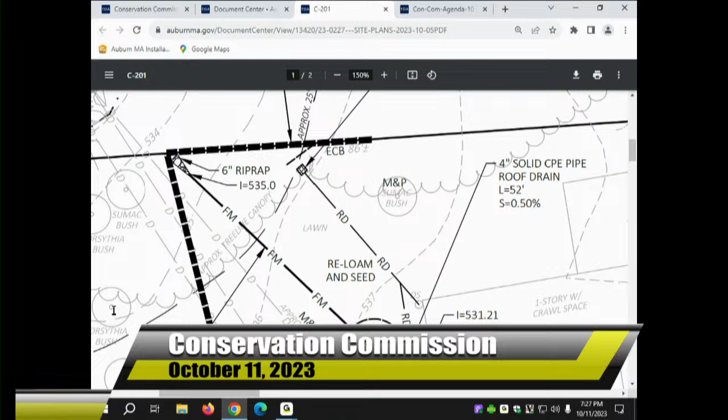So what I proposed in that situation was a slotted drain, or one of the NDS drains that you can get at Home Depot for like $30, with perforations in the bottom of the drain with some stone. That would serve as the overflow, so that when the water comes down through the downspouts and comes out to that area, there's enough gravity or enough grade in that area to cause it to just come out the top and be flush with grade.

The other situation was pretty interesting, a little bit more challenging. As engineers, we like to avoid mechanical systems, and I tried to do that here. However, as part of my limited topographic survey, I had gone out to the lot, shot the elevation of the top of the foundation, grades around the house, the elevations of the existing.

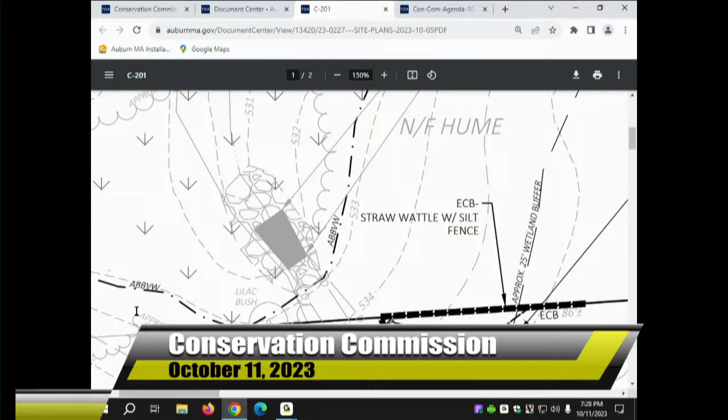If you could, Jesse, pan to the left over to the rear left part of her property. There you go, north. So there we have a flared end. It's a 36-inch HDPE high-density polyethylene corrugated pipe, along with a 2-inch water pipe.

It's a polyethylene pipe. That was installed years ago by the Auburn Highway Department, now the DPW. As part of the installation of that, Bill had installed the force main for the sump pump in the basement. Historically, like all the houses in that area, the hydrologic soil group in this area is hydrologic soil group D, and as you folks know, that's a horribly draining soil.

It used to be an old farm. They rerouted a stream eons ago in that area. So what they had done is, in some parts of the site, they left the soil. Other areas, they put in some of the Hinckley soils off the hill to the west, which are well-draining soils. They brought it, pushed it down below. So if you dig a foot down or so, the soils are great. However, when you get deeper into the ground, you can find those Woodbridge soils.

So with that, I looked at it and I said, okay, the infiltration, that's part of the problem why we're getting what we're getting in the basement. I took some photos, which I included as supplemental information to the Little Diggers filing, along with the plan. As you can see in those photos of the basement, there was standing water in there a week and a half ago. I can pull those up if everyone wants to take a look.

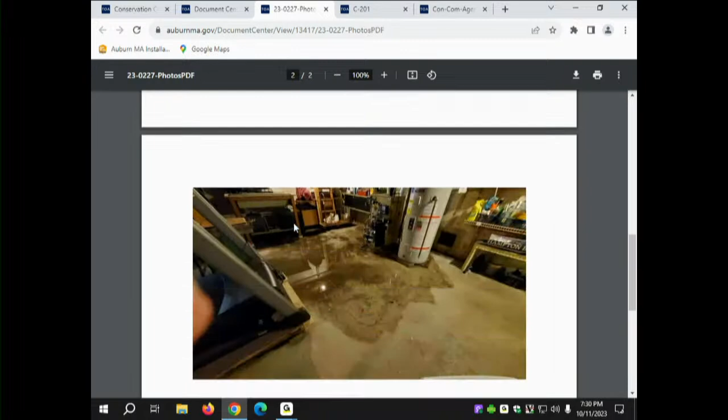Yeah, it was, and this is something that they've lived with for a while. Very frustrating. There's a new oil tank there, which will help to address one of the comments raised by DEP. But there's standing water, it's horrible. The sump pump goes on, I would say, every 10-15 minutes throughout the winter, and in the summer, all summer it's been going. So I think this is a project that needs to get done.

So what they hired Little Diggers to do, if we could go back to the plan, Jesse. Thank you. So right here, this is the existing information in terms of the inverts of the pipes. Knowing the area very well, what I've noticed is that in the less frequent storms, you're 25, you're 50, some people say you're 100. We haven't, as far as I know, in this town of Auburn, we haven't seen one of those yet.

But in looking at these storm events, what I've noticed is the pipe, typically that 36-inch pipe, is designed to flow typically half full. I've seen it flow all of 2/3 full and then some. So with that said, looking at the invert elevation, Jesse, if you could pan up a little bit so I can see the invert elevation callout. So that invert is at about a 530.6 on that flared end section.

The invert elevation on the force main is at a 532.8.

That just so happens to be about the same elevation of the basement floor, based on the top of foundation, measuring down the wall and determining the slab elevation. I said, okay, so we're at 532.8.

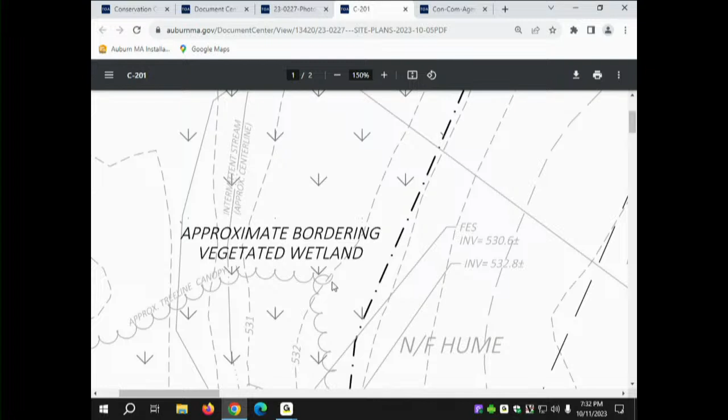I went to the bottom of the footing for the foundation drain. By the time I daylight the foundation drain out to that location, Jesse, if you could go out, it would have come out somewhere, if I recall, like 531 and change, 531.2, 531.4. Coming out at that elevation, it would have been submerged in the tailwater of any storm event.

That would only exponentially exacerbate the situation in the basement. So had we flowed gravity to that location, when that area surcharges, it's going to back water up through the pipe that would have been put in the ground and come up into the basement.

The plan originally submitted by Little Diggers was looking at a gravity system. If you didn't know the history of how that pipe functions, or how hydraulics work when pipes are designed, they're designed to flow half full or two-thirds full. If you didn't know that, you'd probably site it at that location.

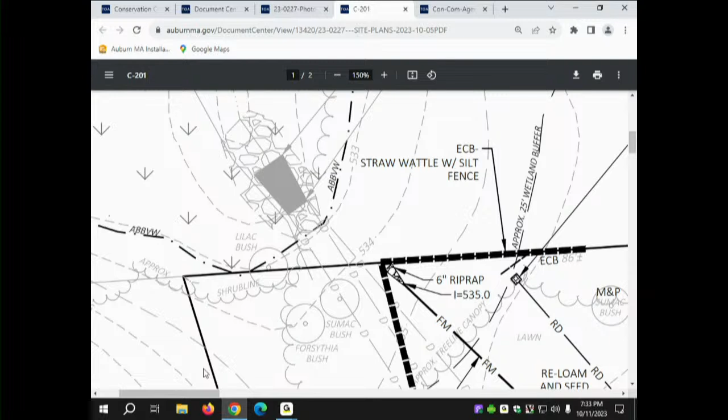Well, having known that, I said it's obviously going to have to be a pump system, something I don't like doing, but in order to rid themselves of the situation, they have to do it. Jesse, if you could go back over to the foundation, please.

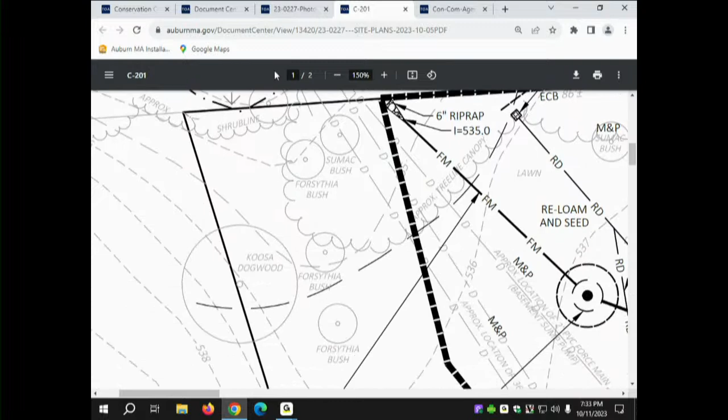So what they are proposing is along the front where you see the FD, the bold line, that's the foundation drain. They're going to excavate the front of the house down to the bottom of footing, put in the foundation drain, wrap it in a filter sock or Mirafi fabric, and then put 3/4 inch to 1.5 inch wash stone with a Mirafi liner up the sidewall to prevent any silt from making it into the stone, and that will serve as their foundation drain.

That'll come up to within about 6 inches of finished grade. That will flow from that elevation at 0.5%. I could have put it in flat, but I wanted to get it the heck out of there, so I ran it at 0.5% from over by the garage at the 533.5 all the way over to that circular structure, which has got a drain manhole.

It's going to be a precast drain manhole, only because of the depth of the structure. And so what it is, it's a pump chamber. They would have a pump chamber, with a pump located at the bottom of that pit.

I have a 3-foot sump in there so that the water will flow through the foundation drain into the pump chamber, drop down into the 3-foot sump, from where, once it fills 3 feet, it's going to get ejected out to the riprap apron out back.

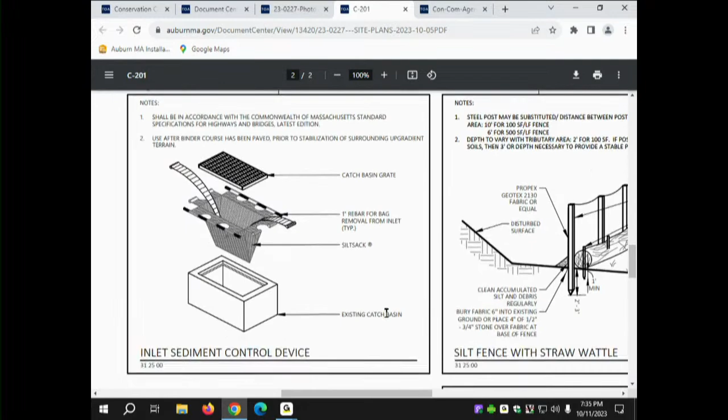Yeah, so actually, if you want to zoom out totally in the detail sheet, I can tell you what we're going to do for erosion and sediment control measures.

So if I could, I failed to get into the total scope of the project. It's a few things: there is a water pipe, she's looking to have the water service to the house replaced, she's looking to have the foundation drain situation addressed, rooftop runoff redirected underground, and she's looking to have her front walk redone and the front steps. So it's a little bit more than a new water service to the house.

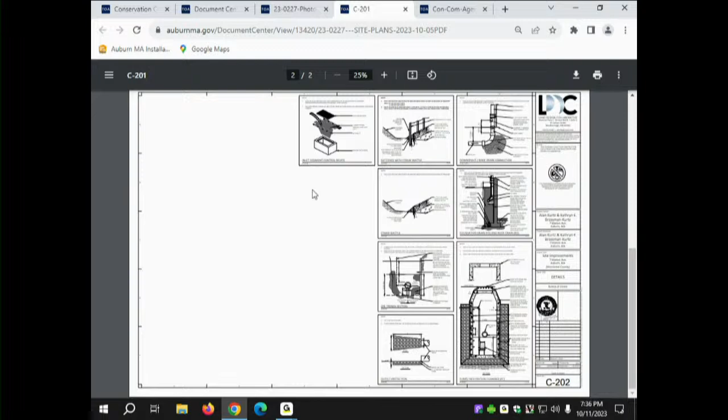All of this work is being done upgrading the proper erosion and sediment control measures. So now that we're into the full scope, and I don't mean to keep doing this to you, Jess, if you wouldn't mind going back to the plan, so I can show you the erosion and sediment control. So to the front, Jesse, if you could.

So in the front, what we're proposing is, because they're doing work, as you can see the contours from the house over near the step pitch out to the street into the driveway. Because of that, we'd need to intercept any sediment or sediment-laden waters that would move across the lawn out onto the pavement. So what I propose there is a straw wattle to be staked in that location.

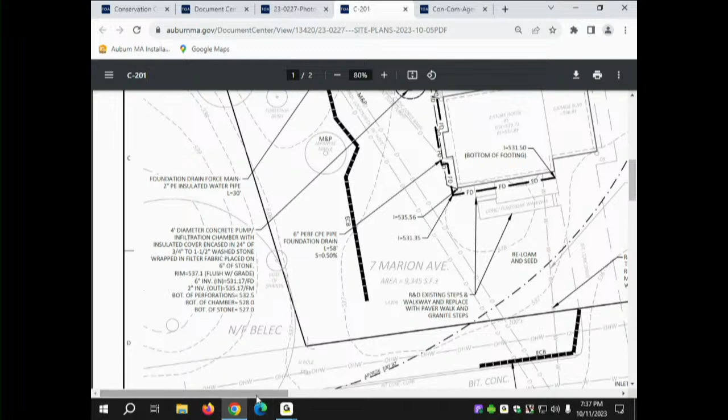And then over to the east of that, Jesse, I have proposed in that catch basin an inlet sediment trap. I'm sure you folks have seen those before. So basically what will happen is anything that makes its way down the driveway that would get into that catch basin will be caught in the trap, and they would have to maintain that along with their other erosion sediment control measures as construction is occurring.

So typically on a project, we would propose an anti-tracking pad on a site. If this was a subdivision or a site plan, we certainly would have all those bells and whistles in place. However, due to the scale of the project and knowing that it is a single-family house, the machinery going up the driveway is part of the order of conditions. If the commission would like to include sweeping of the site after each workday, we would be happy with that. But I didn't see any reason to propose cutting out the driveway and putting an anti-tracking pad in. So with that said, if we could work our way along these erosion sediment control measures here, Jesse.

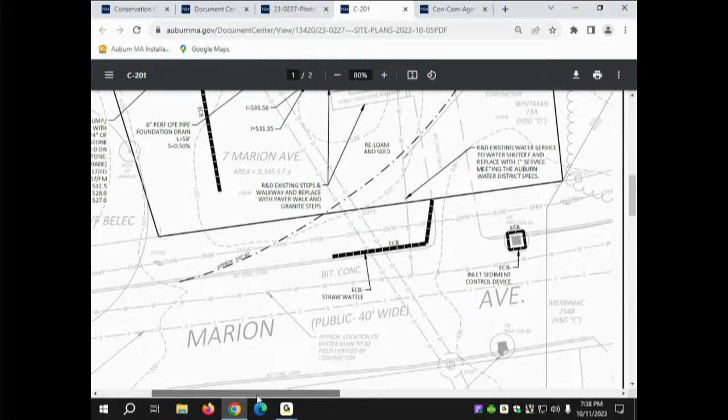So the erosion sediment control measures work their way along the westerly portion of the limit of work, northerly around. She's got a Japanese maple there, so it'll work around the Japanese maple, which is to be maintained and protected. Her husband has a couple of sumac trees that he planted out there. She would love to see them nuked, but we're going to maintain and protect those.

So they do continue, the erosion sediment control measures do continue out to the rear property line. All the work is being proposed upgradient of the erosion sediment control measures. I did see there was a comment by DEP that made reference that all work should be proposed upgradient of them. I'm not sure if they saw that the flared end section out in the wetland, they may have interpreted that as being part of the scope, and it is not. So all the work is proposed upgradient of erosion sediment control measures.

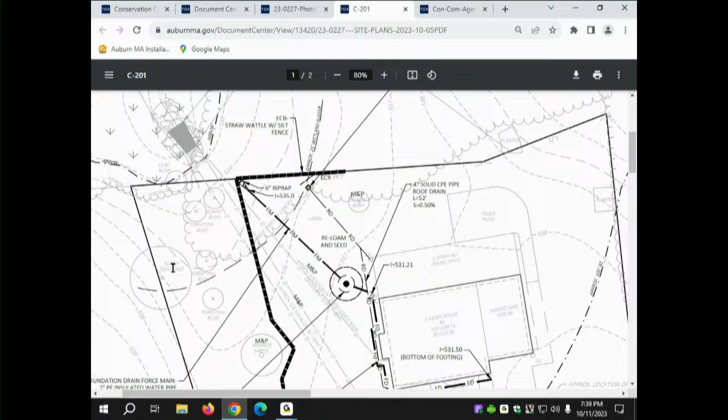So Jesse, if we could go back to that pit detail. Yeah, sure. So a couple of things when I was looking at this, I looked at the approximate wetland elevation out there, and if I recall, it seemed to hover around the 532 elevation. If you look at the limits of the resource area and the vegetation based on my measurements, it looks like it hovers around elevation 532. So I said, okay, if I propose a leach pit that goes all the way down to the bottom of the sump, what they're going to be doing is it'll be lower. It's actually at elevation 528. The wetlands at 532.

I doubt there's going to be much migration through those types of soils laterally with the wetlands, the hydrology to the wetlands, but I didn't want to risk it, so I said, okay, we're going to make that lower section of this structure solid. It's going to be a solid concrete base, monolithic base, so that from elevation 528, which is going to be where the pump sits, up to about 532 and a half, there are no perforations in the structure. Beginning at 532 and a half, upward, there are perforations. And what will happen here is any groundwater in that general elevation is going to flow not only into the foundation drain, perforated drain, but within this leach chamber.

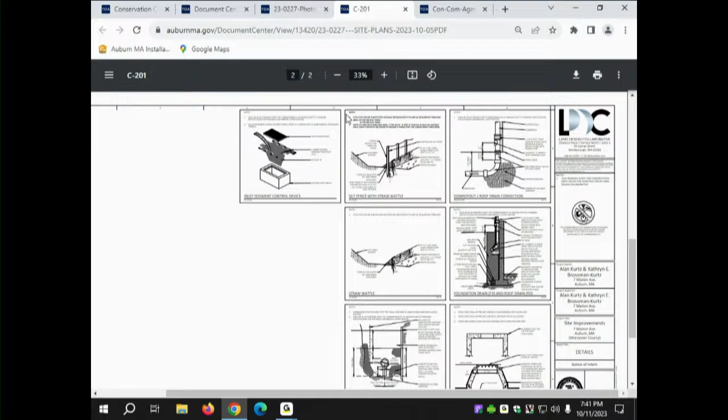What about maintenance of the sump pump? So that's on the homeowner. Clearly, but the question is, what's a reasonable maintenance schedule for that? So like any sump... And how does the homeowner do it?

So basically they would remove the sump pump, like the one I have in my basement. I would hope that when it's installed, they would put some breakaway fittings on there, so that if it has to be removed—that structure, Mr. Chairman, is an 8 to 9 foot deep structure. That's the real baby.

Is there a ladder going down into it? Yep, right along the sidewall of the structure—typical manhole, so it would go right down the sidewall. They get down into the structure, remove the pump, and replace it.

Okay. And has Little Diggers been provided with a copy of this? They have.

Okay. And are you confident that they will follow the plan as you proposed it? I love the question, Mr. Chairman. I'll answer it—I'm not asking you to guarantee their work, but, I mean, as you know, when they came before us the first time, they gave us this, which did not instill confidence in any of us. So I think your plan is what should have been submitted originally. I just want to make sure that they comply with the plan you've provided.

Mr. Chairman, I appreciate that question. As I said when I introduced Kathryn, she's also a friend, so I want to make sure she gets a fair deal here. That's why I got involved, just to make sure it was going to get done right. Now, with what Little Diggers had originally designed, since they didn't know about the backwater situation, it would have failed. But if you don't know much about hydraulics and how pipes operate, you wouldn't know.

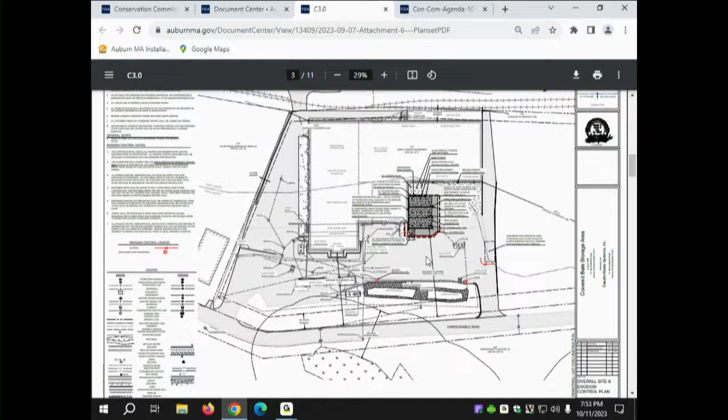This shows a similar figure, essentially the removals and the erosion controls on C3.0. A little difficult to see, but the red identifies erosion control. Those are silt socks that we've positioned at the down gradient side of the work area. That heavy dash line essentially is the perimeter of the work area.

There is a pretty steady slope. You don't have the contours here, but the slope goes in the direction towards the detention pond. In fact, all drainage from this area kind of splits in the middle. A portion goes to this catch basin on this side, and then a portion drains in this direction to a catch basin closer to the truck scale. That drainage all goes through their existing system. There's a sediment device here called a Clara unit, sort of an oil water separator and separation unit. It drains through that catch basin and works its way to a 12,000 gallon underground oil water separator before it goes into the catch basin and discharges off-site and eventually across Hardscrabble Road.

So that's, in general, the footprint of work and the extent of it. There's also potential excavation for the footings and walls for the system. It's segregated into 3 separate sections of concrete slab, as I mentioned, stepped down. So there will be some excavation and likely some excess soils that will need to be managed off-site, as well as the demoed slab area that's going to be replaced in kind, with minor differences.

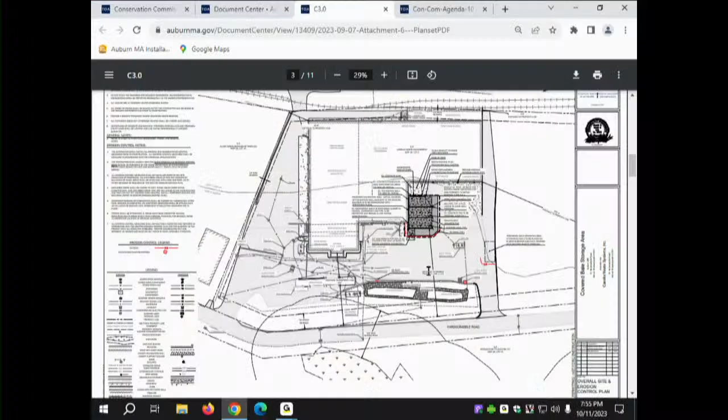How many square yards of concrete are we talking about? I don't know the square yards. It's an 8-inch slab. It's just under 3,000 square feet, I believe, in total. Okay.

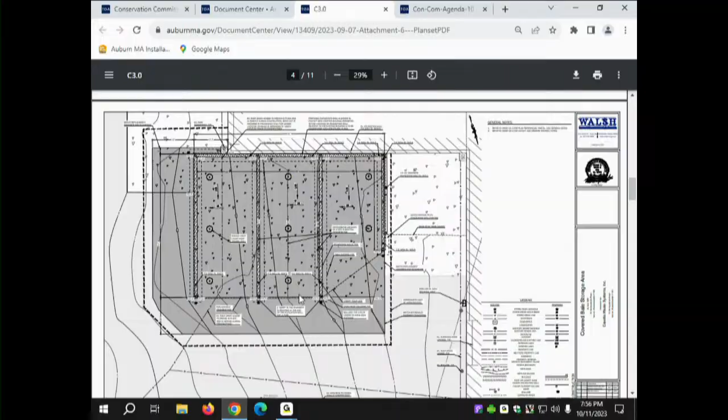So excavate, and will the slab be poured in one pour, or a few pours? I believe the slab would be placed in one event. Okay, it's not a large area. And the foundation walls extend above grade to provide a barrier between the bays, if you want to call them that, and there'll be protective steel on the sides just to prevent movement and protect the structural steel itself.

So what's the estimated duration of the project? I'd say 4 to 6 weeks. Okay, that's what we anticipate. Some of us are more familiar with this site because we've done a number of site walks there. I think it's very straightforward. I don't have any questions.

Megan, any questions? No. Chris? Sounds good to me. Just for background, if I can interject, I think there's benefits to stormwater here, right? The struggle of having to place bales outside and cover them can be dangerous and it's just not very effective, to be honest with you. Sure. And then the safety part, the fire department's concerned about these bales if they happen to catch on fire, the danger that they present. So it'll be obvious.

Michelle, do you have any questions? I think we lost her. Nope, I'm good. All right, thank you. Appreciate it. Okay.

I don't know that a site visit's gonna be particularly illuminating, but I'll certainly defer to the commission on that. Thoughts? I'm not familiar with the site, being fairly new to the commission. Well, then maybe you should see it. I was gonna suggest that, that maybe I just take it on myself and go by, take a few pictures and analyze them myself. If any questions come up, I'll let you know, Mike.